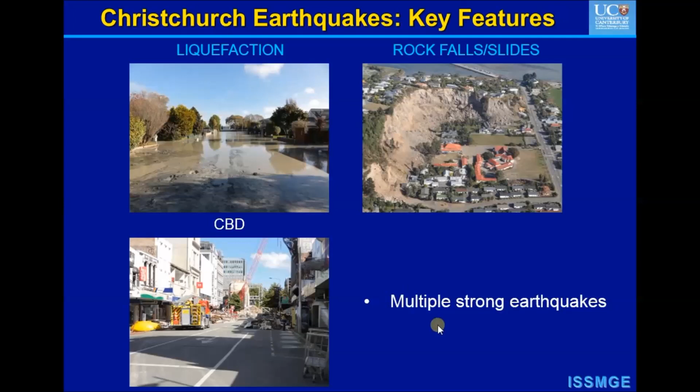So I'm going to focus on the impacts of liquefaction in these earthquakes, and we'll first briefly discuss the key characteristics of the Christchurch earthquakes, and then we'll follow with the discussion on the characteristics and manifestation of liquefaction and lateral spreading, followed by their impacts on buildings and infrastructure, including a little bit about residential land and buildings, multi-story CBD buildings, bridges, and pipe networks such as the wastewater and potable water systems of Christchurch.

Since the presentation is very dense and contains lots of information, I'm going to provide some summary remarks on these topics as discussed, and then we'll have brief general concluding remarks at the end of the talk. So let's start with the characteristics of the Canterbury earthquakes.

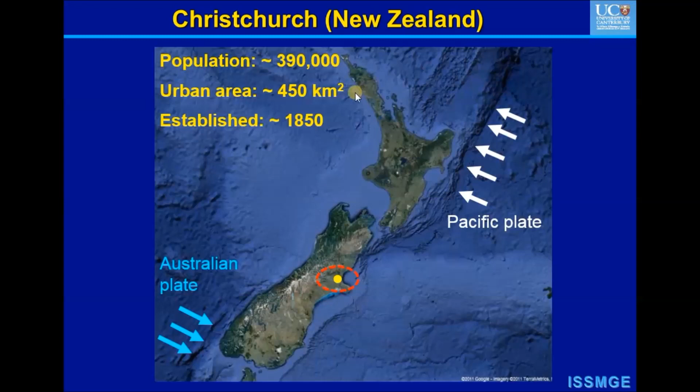Christchurch was established in the 1850s and is currently the second largest city of New Zealand, with a population of about 390,000 and an area of approximately 450 square kilometers.

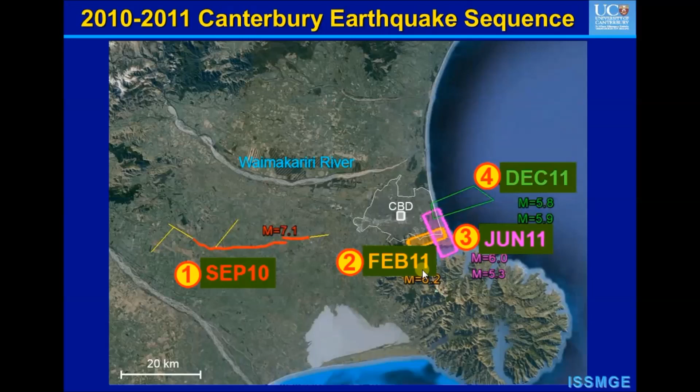What is evident is that all these earthquakes have sources within the city boundaries, and hence their effects were very damaging because they produce very severe ground motions. This kind of unzipping of faults and seismic activity is not unusual from a seismological perspective, but it was highly unusual that an urban center was affected repeatedly by very strong earthquakes with sources within its boundaries.

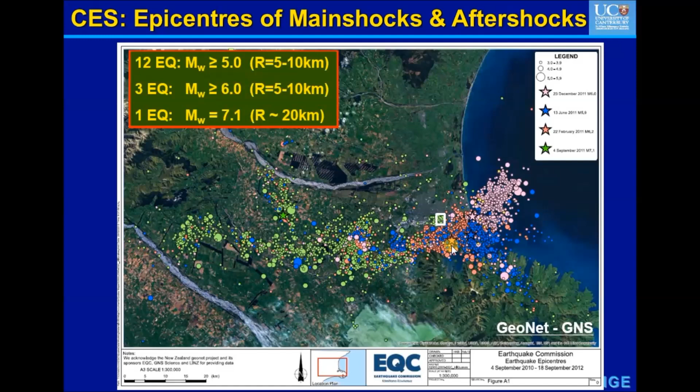This slide shows the cumulative impact of earthquakes. Here each earthquake is shown by its epicenter, and we can see indeed that the sources of these earthquakes were within the city suburbs, and in particular the February 22nd earthquake produced heavy damage and extremely violent ground shaking.

In all other events, however, we can also see reasonably high PGAs of 0.15 to 0.2 G, and these are all damaging levels of ground accelerations, and indeed in all these events liquefaction was induced. But of course particularly damaging was this event on the 22nd February 2011, which we can consider as an extreme event.

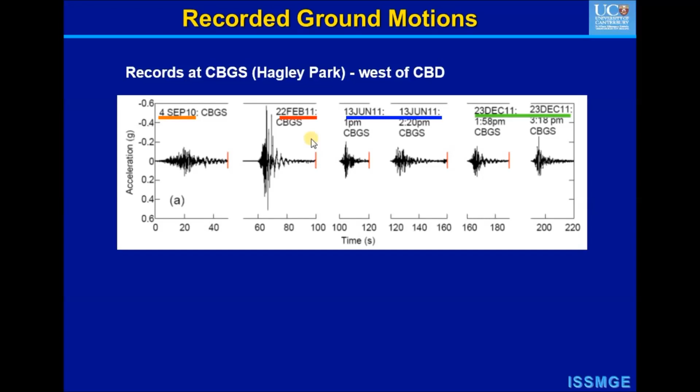It is common in liquefaction evaluation to quantify the seismic demand using the cyclic stress ratio, or CSR, which is then normalized to an equivalent magnitude 7.5. So we have calculated CSR 7.5 at shallow depth at the water table, and in such case this CSR value is actually a function only of the PGAs and the magnitude of the earthquake. Using this data, it was easy to calculate CSR 7.5 values at the water table, which in this case we will see is very shallow at 1 or 2 meters depth, and we've got very high CSR values from 0.15 to 0.3.

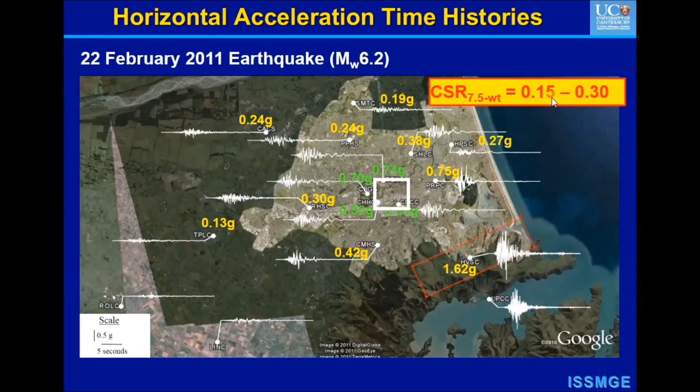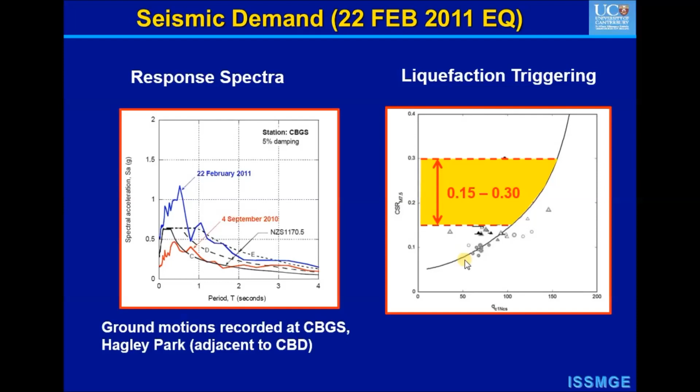Or if you like, with increase in the density of the soil. Here we have the seismic demand caused in terms of CSR by the 22nd February earthquake, from 0.15 to 0.3 CSR values, which far exceed the liquefaction resistance of low to medium soils with low to medium penetration resistance, or soils with low to medium densities. This shows that the seismic demand was exceptionally high, both for buildings as well as for liquefiable soils. And as we are going to see, many of the soils in Christchurch actually have a very low liquefaction resistance, so the widespread liquefaction that occurred during this event was not unexpected.

So in summary, unfortunately the February event caused also 185 fatalities, and it caused the complete destruction of the CBD. As I mentioned, nearly 70% of the buildings, or approximately 2,000 buildings, have been demolished. The earthquakes also caused tremendous damage due to liquefaction, widespread liquefaction affecting 60,000 residential properties, out of which 20,000 were severely affected and 8,000 were abandoned because it was considered uneconomic to reinstate those areas as residential areas.

The liquefaction also shattered the lifelines of Christchurch. For example, the wastewater system had loss of service or limited service over approximately 700 kilometers, and there were over 4,000 breaks on the potable water pipes. The liquefaction also caused heavy damage to roads and bridges, and lateral spreading was particularly damaging for areas close to waterways.

The total economic loss inflicted by these earthquakes is estimated at 40 billion New Zealand dollars, or approximately 20% of New Zealand's GDP. A simple calculation suggests that nearly 50% of these losses, or approximately close to $20 billion, was due to ground failures and liquefaction in particular.

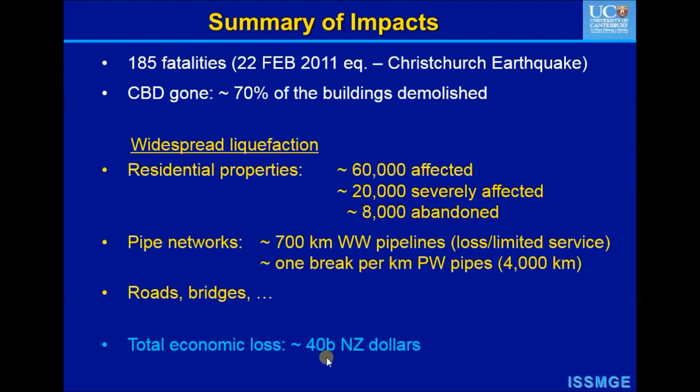In order to better understand characteristics of the Christchurch liquefaction, I am going to provide a very brief overview of the geology and ground conditions in Christchurch. As I mentioned previously, the plains are built of very thick deposits of gravel and sand layers interbedded with fine-grained soils, forming a complex interbedded formation with gravel aquifers and with artesian water pressures.

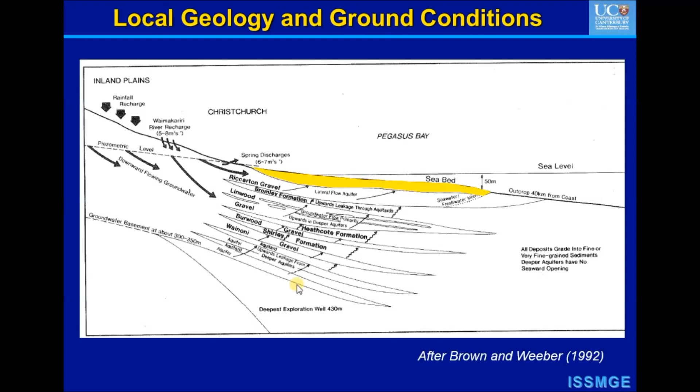It is estimated that approximately 10,000 wells have been sunk in the area of Christchurch since the 1860s, sourcing water from 20 to 200 meters deep wells. So for the liquefaction evaluation, we are going to focus on the near surface soils in the top 20 to 40 meters. This is an east-west cross section.

Here is the coast, and this is the sea level. At the west edge of the city, the elevation is about 25 meters above sea level, and then we have a very gently sloping ground towards the ocean - 25 meters elevation difference over 17 kilometers length.

So the surface alluvial soils overlie the topmost gravel, the Riccarton gravel, which is a gravel of an older age, 15 to 70,000 years old, and is also the uppermost aquifer. The thickness of the alluvial deposits, or depth to Riccarton gravel, is about 10 meters in the west part of the city, 20 to 25 meters in the CBD, and about 40 meters at the eastern edge of the city.

Because of the issues with aquifers and potential water contamination, the CBD buildings are typically on shallow foundations or on pile foundations which are within the alluvial deposits, so the tips of the piles do not reach the deeper and more competent gravel layers.

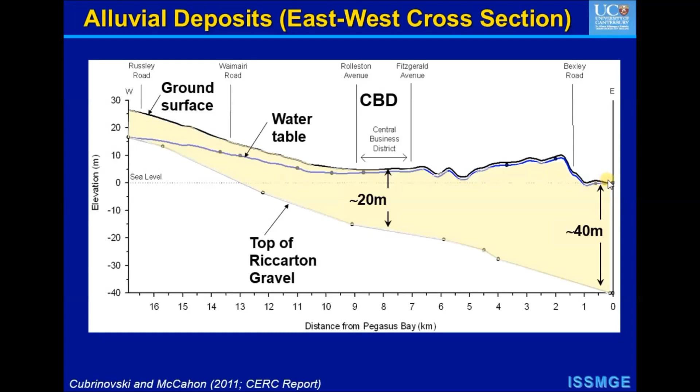The water table is at 5 to 7 meters depth in the western part of the city, and then becomes progressively shallower. It is within the top meter or two from the ground surface in the CBD, and is also very shallow to the east, in the eastern suburbs of Christchurch.

This is apparent in this slide, where median depth to water table is shown, and bluish colors, which are predominant in this slide, actually indicate very shallow water table at the ground surface, 1 or up to 2 meters depth. So most of the soils are fully saturated close to the ground surface.

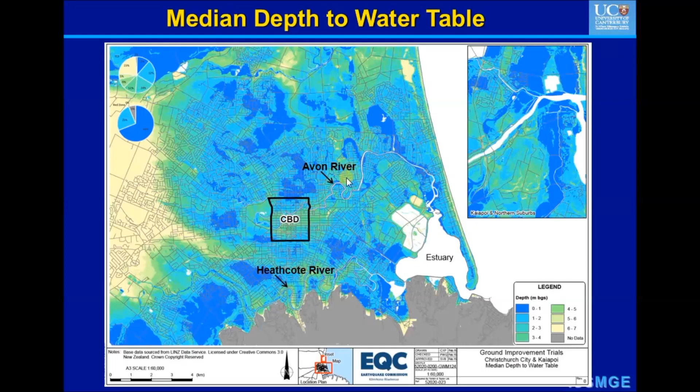Two dominant features present in Christchurch are the Avon River, shown here, and the Heathcote River to the southern part of the city. These rivers originate from the western springs in Christchurch and then meander through the city and discharge in the Avon-Heathcote estuary. As we are going to see later, particularly heavy was the liquefaction along the Avon River.

This is how Brown and Weeber describe the city of Christchurch in their excellent study on the geology of Christchurch. They say originally the site of Christchurch was mainly swamp, estuaries and lagoons, gravel, sand and silt of river channel and flood deposits. The Waimakariri River regularly flooded Christchurch, and since European settlement in the 1850s, extensive drainage and infilling of swamps has been undertaken.

Using data from their study, we prepared this plot where the age of the soils was estimated based on radiocarbon dating of soil samples and is plotted against the depth of the samples. The plot shows that in the top 5, 6, 7 meters the soils are relatively young, less than 2,000 years old, and in the shallower parts we can see some soils which are only a few hundred years old.

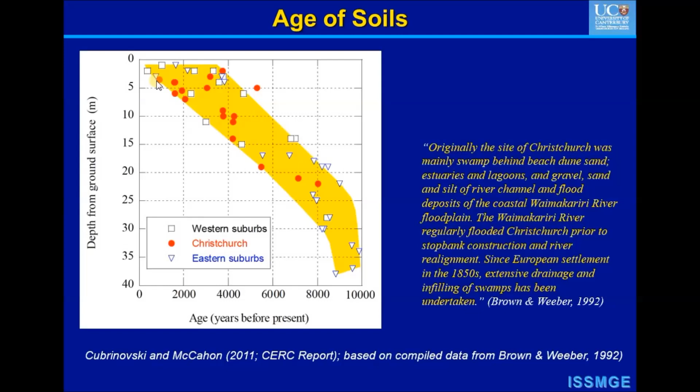So in summary, by their composition as fine sands or silty sands with low plasticity or non-plastic fines, deposited at low or medium densities associated with a fluvial depositional environment, fully saturated with a very high water table close to the ground surface, and a relatively young age, these are all factors pointing to a very high liquefaction potential.

One may also argue that the intense groundwater regime and water flow prevented some beneficial aging effects from developing and increasing the liquefaction resistance, which otherwise would have occurred in a more stable and less disturbed ground environment.

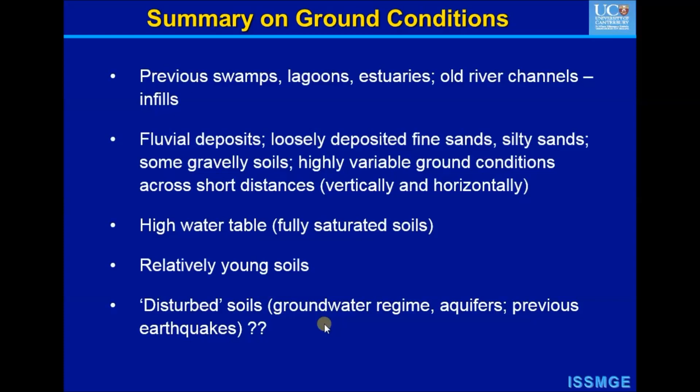So, having in mind the very high seismic demand on one hand and the very high potential for liquefaction of these soils, it wasn't a surprise that the very severe shaking produced by the February earthquake caused extensive liquefaction throughout Christchurch. Following this earthquake, we conducted a drive-through reconnaissance in order to document the manifestation of liquefaction throughout the city.

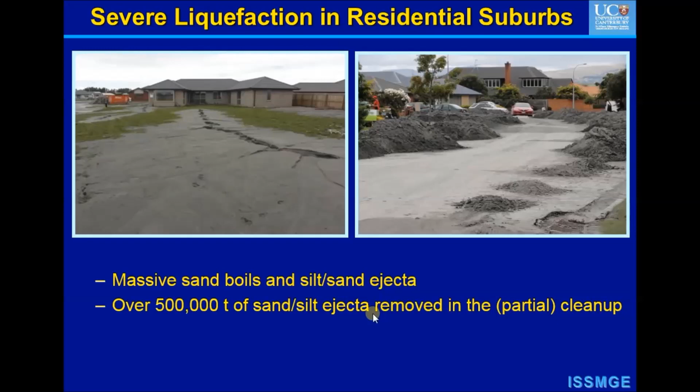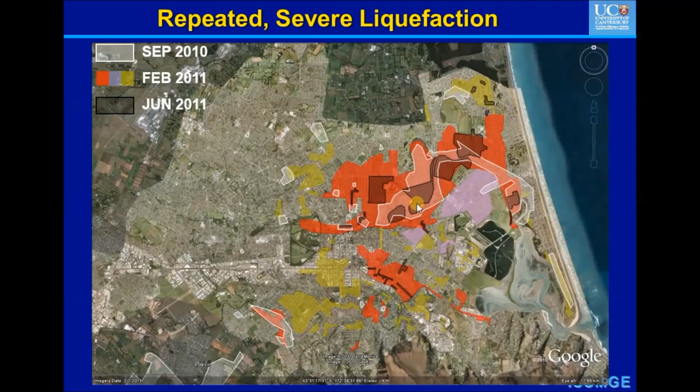Probably the best evidence for the effects of liquefaction was obtained for this property at Avonside, where my colleague Mark Quigley documented the liquefaction in the backyard. You can see significant sand boils covering the backyard after the September 2010 liquefaction, with clear cracks and fissures through which water, sand and silt were reaching the ground surface, forming a line that goes toward the door of this shed.

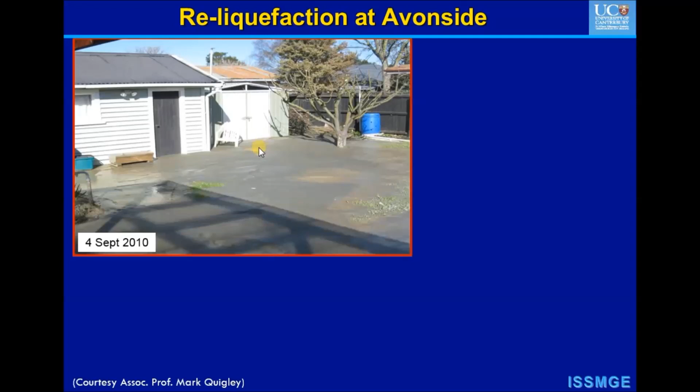They cleaned up the property, and then this is what happened in the second event, February 2011. We are seeing exactly the same alignment of sand volcanoes along the same crack or feature, which obviously served as a pathway for water and sand ejecta in the subsequent event.

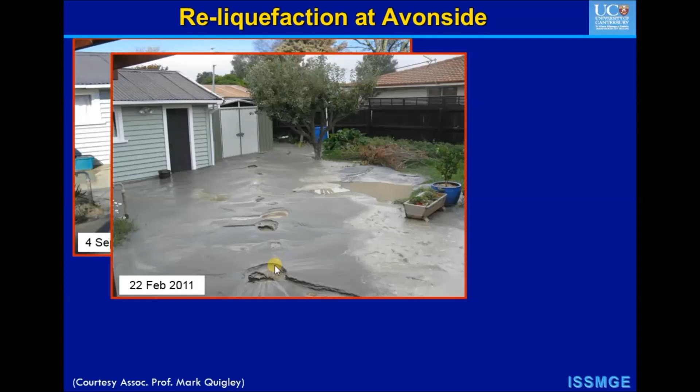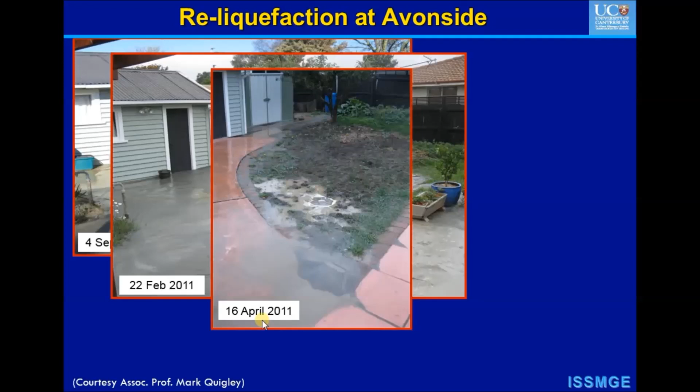They cleaned up the property again, and we are seeing now very small evidence of liquefaction during a minor magnitude 5 event on April 16, 2011. Then there was the 13th of June event, first magnitude 5.3, and then magnitude 6 eighty minutes later.

So we can see repeated liquefaction with very severe manifestation of sand boils, and pretty much the same features appearing along which water and sand ejecta reach the ground surface. This is not surprising. Clearly, liquefaction results in very non-uniform ground deformation. It also creates weaknesses, especially in the surface parts of the deposits, cracks and fissures, which create pathways for water and sand ejecta to reach the ground surface in subsequent events.

Also, if we think about the liquefaction process, it is associated with significant seepage and water flow, which disturbs the soils near the ground surface. We also know that following liquefaction, soils resolidify and reconsolidate under gravity loads, getting densities that are not very high. So the density of the soil deposit after liquefaction is going to be medium density, not very high. We also know the fabric of these soils is going to be very weak and highly susceptible to reliquefaction. And the behavioral age of the deposit is going to be reset to zero, because liquefaction erases any beneficial effects of aging in terms of increased strength and stiffness.

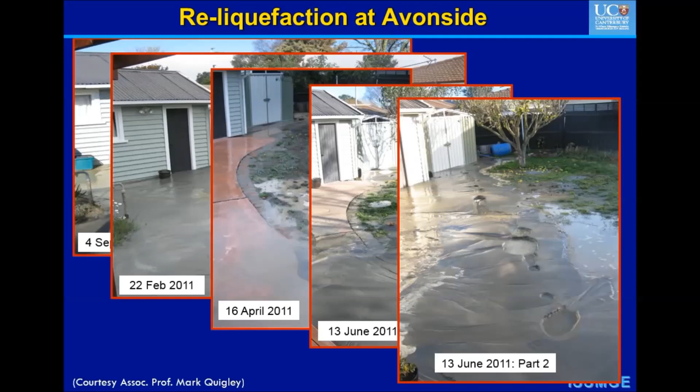I'm mentioning this because quite often liquefaction is associated with substantial settlements, and these settlements are often interpreted as ground densification of the liquefied soils, leading to the assumption that liquefaction resistance should increase after a liquefaction event. I think we have abundant evidence from Christchurch, as well as the reasoning I just outlined, that we should not expect any improvement in liquefaction resistance or performance of structures on previously liquefied soils, especially when the liquefaction caused heavy disturbance of the soils near the surface.

This is now a summary of LiDAR data showing the total settlements that occurred in Christchurch from September 2010 to December 2011. Red color indicates large settlements, some subsidence from 0.5 to 1 meter. We can see that those are areas typically very close to the Avon River or to estuaries.

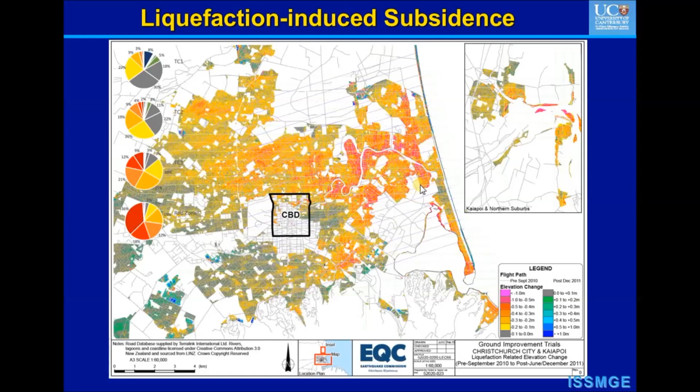Such large subsidence and settlements occurred really in areas that don't have lateral confinement, and were often associated with slumping modes of deformation, including lateral expansion and vertical settlement. Bexley is one of those areas, adjacent to the estuary, and you can see the subsidence here of 1 meter completely changed the elevation in relation to the water in the estuary, significantly increasing the flooding hazard for this area.

So this increase in the risk of flooding, in conjunction with the serious effects of lateral spreading which were prevalent in these areas, were really the two factors why these areas were abandoned and declared as red zone residential areas.

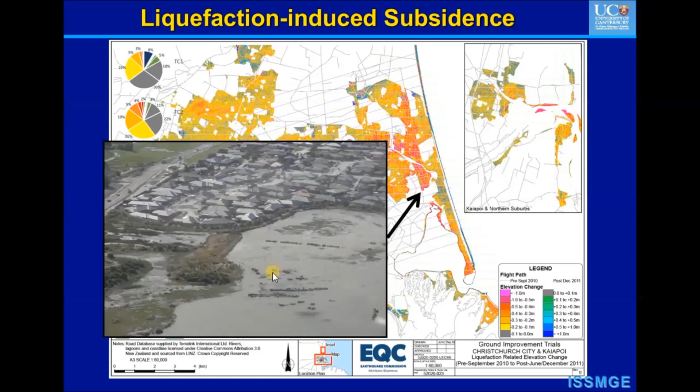Critical layers for liquefaction were these fine sands and some of the silty sands, and there was severe manifestation of liquefaction when there was this kind of thick, continuous liquefiable sand deposit.

In the southern parts of the city, more common are stratified layers where liquefiable layers are sandwiched between non-liquefiable layers or silty soils with Ic values close to the threshold. It was observed that in such cases the manifestation was much smaller and the damaging effects of liquefaction were significantly reduced.

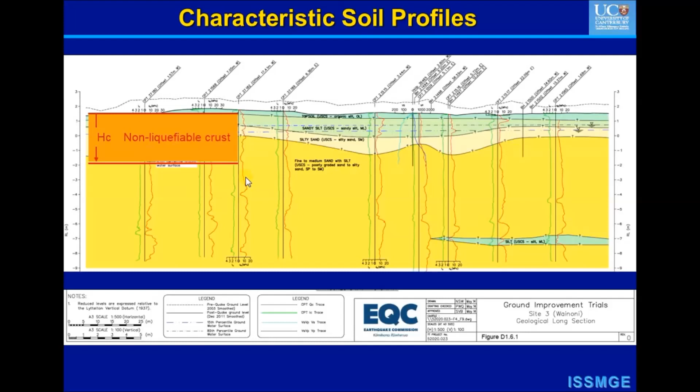This is in line with the well-known conceptual chart of Ishihara from 1985, which suggests the same thing regarding the influence of the non-liquefiable crust layer on the manifestation and damaging effects of liquefaction at the ground surface.

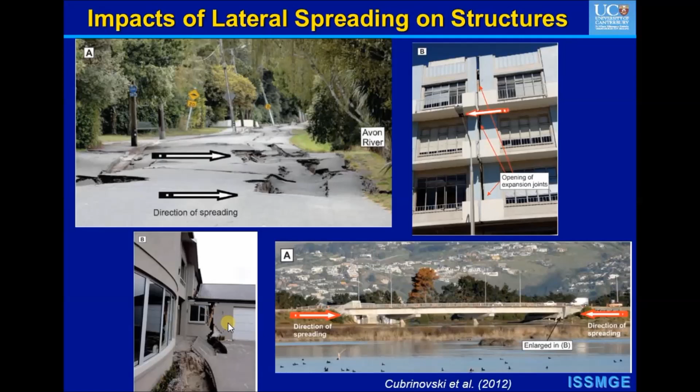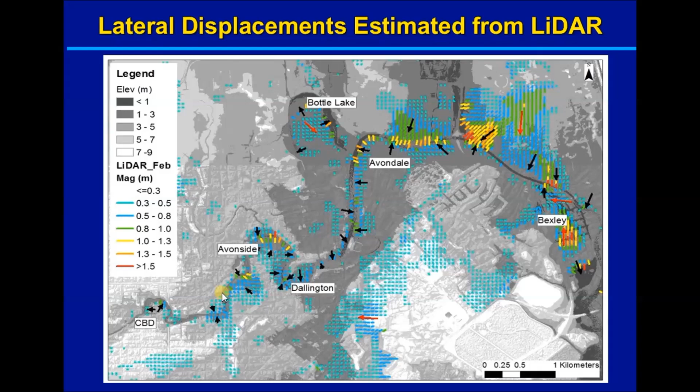Lateral spreading was surely the most damaging phenomenon associated with liquefaction, affecting roads, bridges, buildings, and residential houses. It was typically confined and occurred along rivers, streams, waterways, old river channels, and swamps, and typically affected a zone about 50 to 200 meters away from the waterway.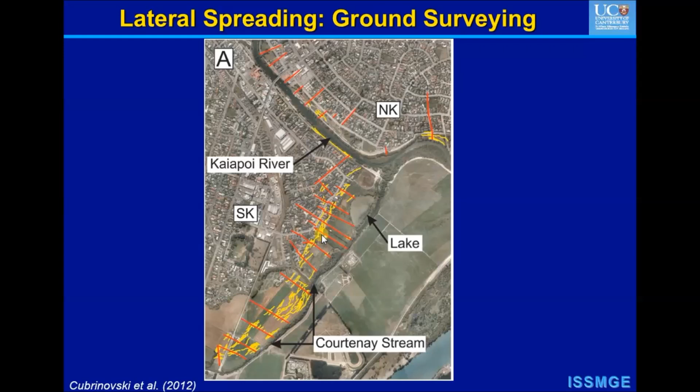Very different lateral spreading patterns were observed in these two areas, so I'm going to point out some of these differences. We did ground surveying and conducted detailed measurements of lateral spreading displacements along these transects, shown as red lines. We would first identify cracks on the ground surface and then measure the width of the cracks to develop plots of permanent lateral displacement against distance from the waterway.

We are seeing two very different distribution patterns. This is North Kaiapoi, where permanent lateral spreading displacements at the river banks were somewhere between 0.5 and 3 meters, decreasing with an exponential decay, which is a typical reduction pattern of lateral spreading displacements. The spreading affected an area of approximately 100 to 200 meters.

We are seeing a very different distribution pattern in South Kaiapoi, where practically a block of soil about 150 to 200 meters adjacent to the river moved towards the river by about 1.5 to 2 meters, and the largest cracks opened behind that block. Those large cracks are indicated by sharp reductions in displacements at a distance between 150 and 200 meters.

Unfortunately, these large cracks and ground openings, due to block failure movement associated with spreading, occurred right where the houses were along Courtenay Drive. These cracks were practically running through houses and rupturing the houses, as shown here.

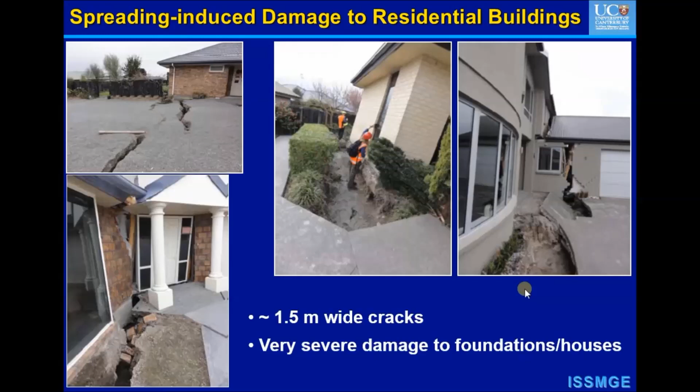Fortunately, the New Zealand houses are timber framed. They are very ductile and can accommodate large deformation without collapse, and practically there wasn't any collapse in these areas despite the extreme ground deformation and demands. So this is surely one of the success stories from the Christchurch earthquakes.

We've conducted ground surveying measurements along a large number of transects, about 150 in total. I'm showing here measurements along the Avon River, where red lines indicate measurements after the September earthquake, and blue lines indicate measurements after the February earthquake.

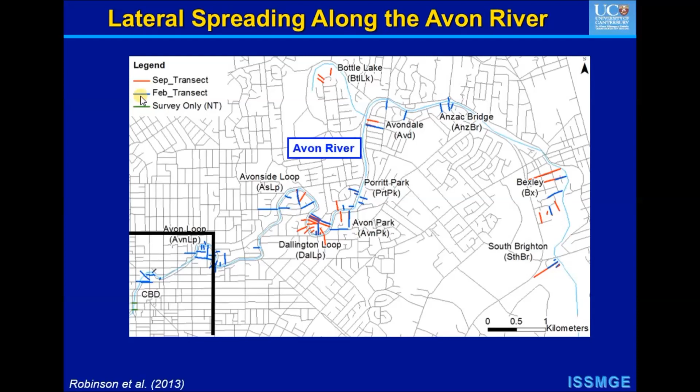Each transect has a summary dataset of this nature, with measured ground displacements as a function of distance from the waterway, with two lines: one for the September event and one for the February event. Then we have the ground slope before and after the earthquake, and a number of CPTs defining the typical soil profiles, which we use to conduct a more detailed liquefaction analysis and identify the critical layers responsible for spreading movements.

In that analysis, we also used details on ground displacements obtained from LiDAR, which provides global patterns of movement, unlike our localized measurements along the transect. So this kind of data has been summarized.

We first eliminated all areas where very complex patterns of spreading were observed, and tried to look into the simple ones, identifying three typical patterns of movement and magnitudes of ground displacements. Here is what we call large and distributed ground displacements.

The spreading displacement in this case was anywhere between 0.5 meter and 1.5 meter, and the distance affected by spreading was up to 100 or 200 meters from the river.

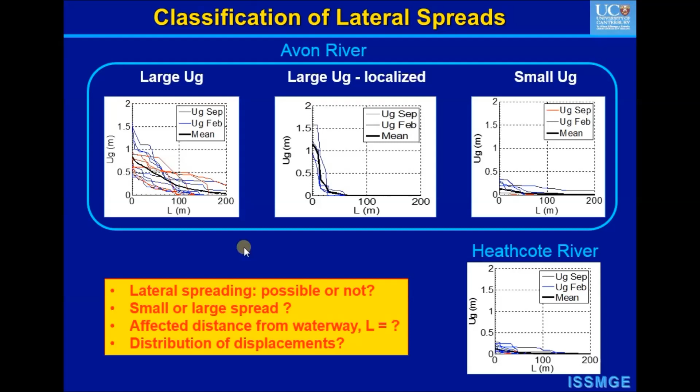So to close this part on lateral spreading, I'll just mention the very complex patterns of spreading observed in meandering loops, with one feature to highlight here.

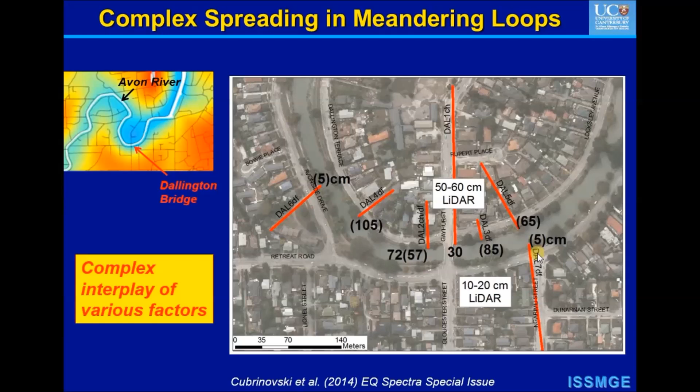This is the meandering loop at Dallington, where on the internal part, with point bar deposits, there were large spreading displacements, roughly 1 meter of lateral spreading movement toward the river. On the opposite side, at the cut bank, where the soils are better, the spreading movements were very small or practically negligible. This is the difference in the approaches to this bridge.

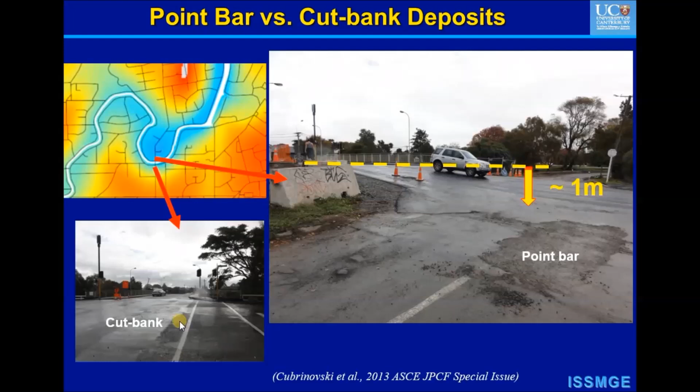On the point bar side, the settlement associated with spreading was close to 1 meter, whereas on the cut bank side, just 30 meters across on the opposite side of the bridge, the approach showed very little ground distortion because the spreading movements were very small in that area.

The second part of this presentation is going to focus on the effects and impacts of liquefaction on buildings and infrastructure, and we'll start first with residential buildings.

New Zealand has a very high earthquake insurance coverage. For example, residential properties and buildings were covered in approximately 90% of cases in Christchurch. What is unusual and unique is that we have insurance coverage not only for residential buildings but also for residential land. For that reason, the agency in charge of earthquake insurance, the Earthquake Commission or EQC, and their engineers, Tonkin and Taylor, performed very detailed inspections to document damage to land and foundations.

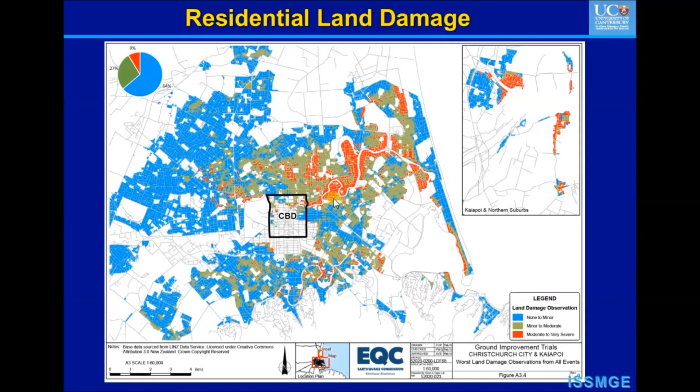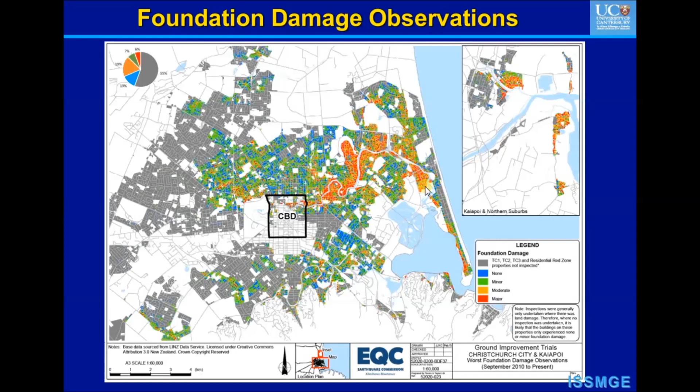Green is minor and blue is none, and gray shows areas that were not inspected for foundation damage because there wasn't any apparent land damage in those areas. The worst damage, covering all four major earthquake events, occurred along the Avon River, and that damage was associated mostly with lateral spreading.

As mentioned previously, residential houses in Christchurch are typically timber frame structures, and here we can see the two prevalent foundation types: concrete slab on grade, and continuous perimeter footing. In the case of single-story buildings on concrete slab, the slab is only 100 millimeters thick and has no reinforcement except near the edges with the foundation beam.

The perimeter footing has different details depending on the age of construction. Prevalent are concrete perimeter footings with different reinforcing details. There is a timber floor supported on the perimeter footing with some additional floor supports internally, and these supports are loosely connected to the timber floor, so they cannot really provide any lateral resistance or lateral load carrying capacity.

So the foundations really have deficiencies in terms of accommodating large ground displacements associated with liquefaction or spreading loads associated with lateral spreading. But we have to put these foundations in the context of the historical development of Christchurch, where these structures were developed well before the birth of earthquake engineering or any engineering considerations of soil liquefaction.

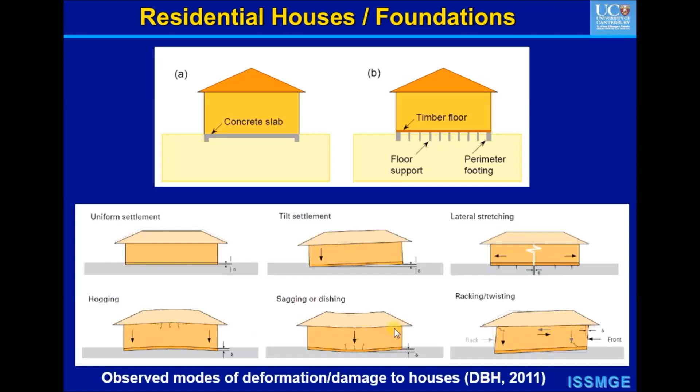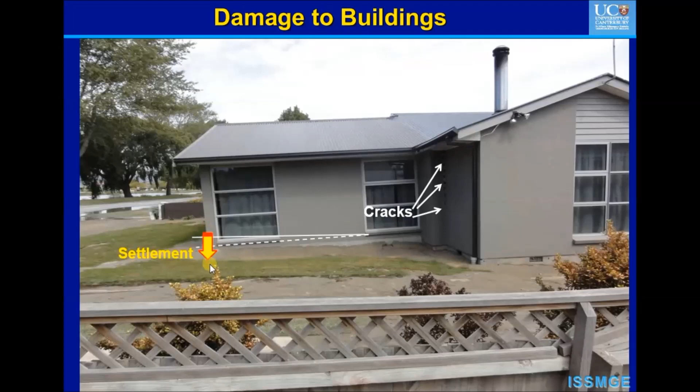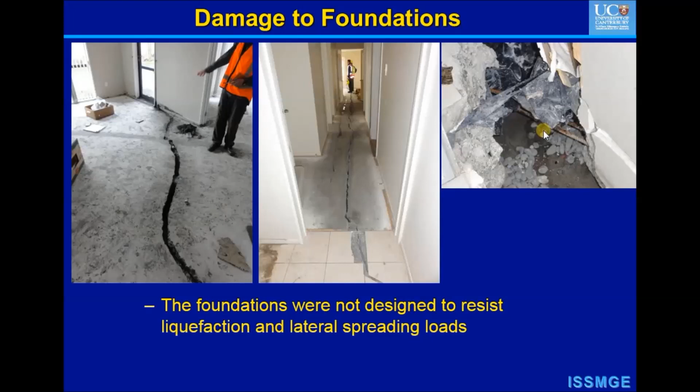Because of the large flexibility and deformability of these foundations, the buildings exhibited a range of different modes of total settlement, differential tilt and settlement, extensional deformation and rupture, and different shapes and distortion of the houses, as indicated in this schematic plot. This is a typical manifestation of liquefaction-induced damage, with differential settlement causing propagation of damage in the superstructure, damage to the concrete slab and cracks due to lack of reinforcement, or rupture of reinforcement in the foundation beam due to insufficient reinforcement in areas subjected to lateral spreading.

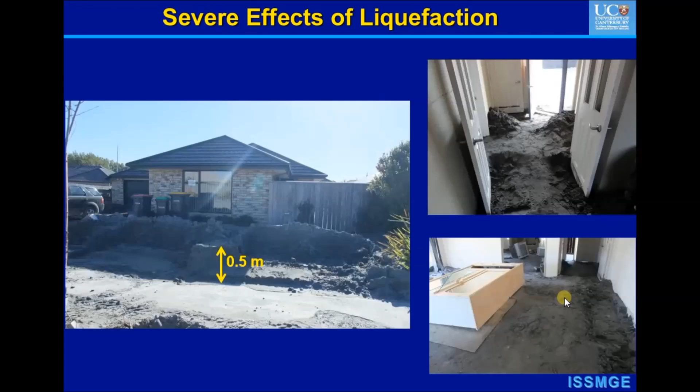Now again, we need to put this in context of very severe effects of liquefaction. As shown here, in many areas the ejecta was half a meter thick, and quite often the ejecta completely covered the interior of the house, as shown on these photos.

We've conducted detailed investigations for 40 such buildings on concrete slab foundations, and measured vertical displacements or settlements at multiple locations in order to identify maximum differential movements and maximum slope of the concrete slab. That measured slope is plotted against the severity of liquefaction observed on the property, for five different categories ranging from no liquefaction, low liquefaction, to very severe liquefaction.

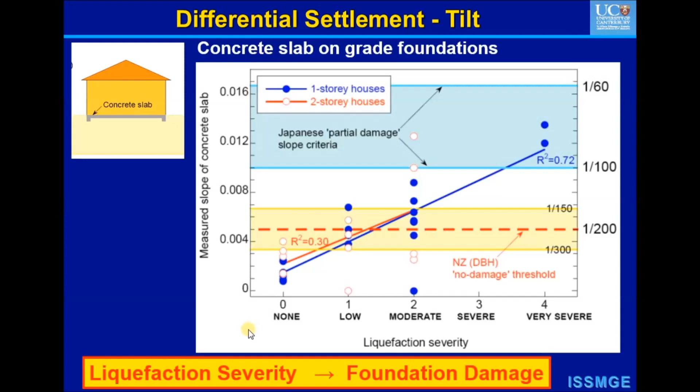Shown here with the dashed line is the no-damage criterion based on the New Zealand Department of Building and Housing, and based on this criteria we can see that these foundations had acceptable performance in areas of no liquefaction, maybe marginal performance in areas of low liquefaction, and inadequate performance in areas of moderate or severe liquefaction. Clearly, the foundation damage is related to liquefaction severity, as was the case for various engineering structures indeed.

As I mentioned previously, 60,000 residential buildings were affected by liquefaction, and 20,000 of those were affected seriously. So there was a comprehensive program developed by the Ministry of Business Innovation and Employment, together with the engineering community, to address the repairs of these residential properties. The first thing that was done was they conducted land zoning and divided land into 3 different technical categories.

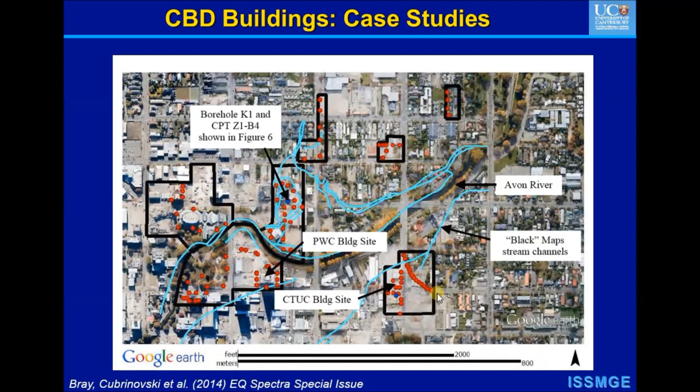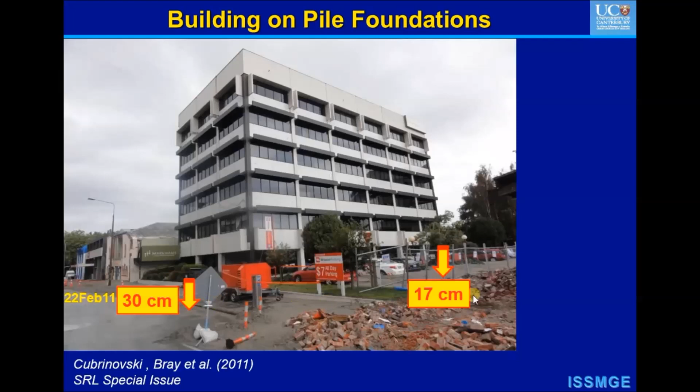In February, the soil surrounding the building settled approximately 30 centimeters at this end and close to 20 centimeters at the other end. You can see now this large vertical offset between the ground, which settled 30 centimeters, and the building, which obviously didn't settle much. This is the beam connecting the pile caps, because the beam was on deep foundations supported at a depth of up to 15-16 meters below the ground surface.

You can see this offset of the foundation beam and the surrounding soil, and the parking lot is trapping the cars, because before the earthquakes this was clearly a flat ground surface. There was additional settlement in this part of 20 centimeters during the June event, where the total settlement reached about 50 centimeters. So this clearly shows the dramatic difference in the performance of shallow and deep foundations in liquefied soils.

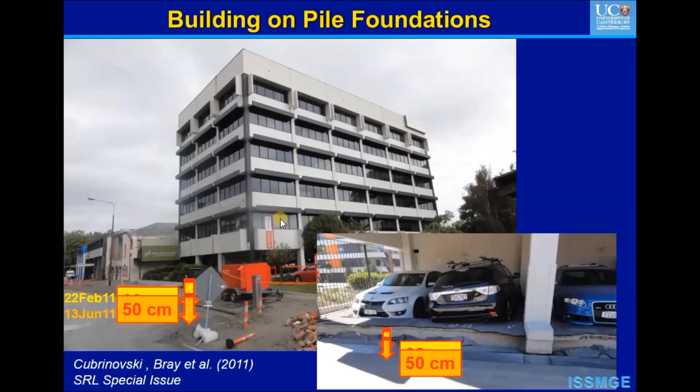Now, this building was demolished due to structural considerations, and unfortunately we don't have details about the performance of the piles and the damage caused to them in these events.

The final point to mention about the performance of multi-story buildings is shown here, where a number of high-rise buildings were showing a permanent or residual tilt after the earthquakes. This is very difficult to deal with because of the size of the buildings and difficulties in recovering and re-leveling them.

There were traces of liquefaction, some evidence of minor liquefaction, which was probably contributing to some extent to this outcome. But we have to keep in mind a range of factors really influencing the dynamic response of these buildings, including their dynamic behavior, soil-building interaction, very complex foundations in particular for this building, and non-uniformity of ground conditions across the footprint of the building. So those are all issues contributing to the residual tilt, but clearly geotechnical conditions and ground response were key contributing factors.

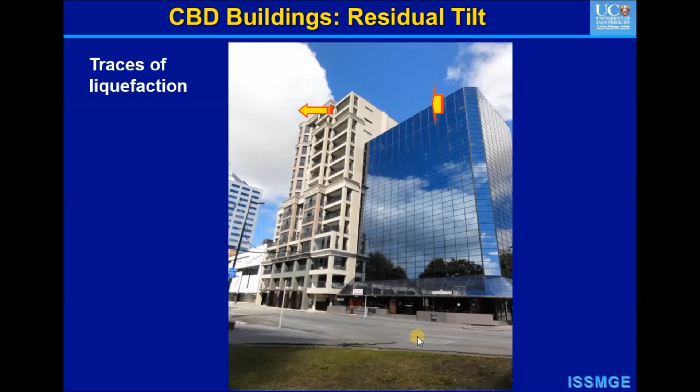Now, bridges in Christchurch were affected in a very specific and consistent way, and I'm going to use the bridges along the Avon River to illustrate the characteristic effects of lateral spreading. The spreading displacements were relatively small in the CBD, up to 30, 40, 50 centimeters. They reached about 1 meter at the Avon Loop, and from the CBD up to the estuary, the bridges were exposed to lateral spreading displacements on the order of half a meter to 2 or 3 meters, depending on the particular location and ground conditions.

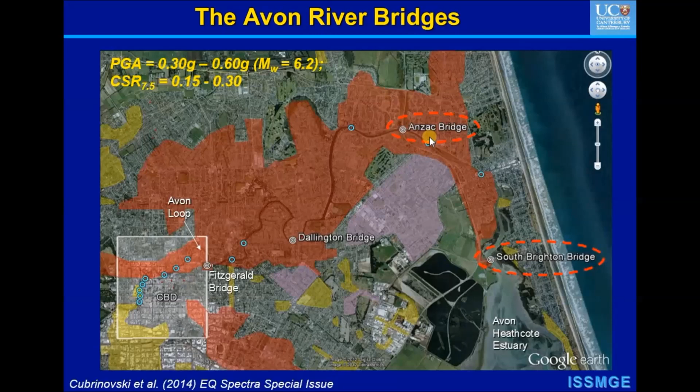So I'm going to use a couple of case studies, the South Brighton Bridge and the Anzac Bridge, to illustrate some of the key mechanisms and damage patterns.

Before that, I will introduce the mechanism itself. The key feature is that the bridges in Christchurch are short to medium-length bridges, typically 25 to 50 meters long, with 2 or 3 spans, and they have a very robust, sturdy, stiff and strong superstructure.

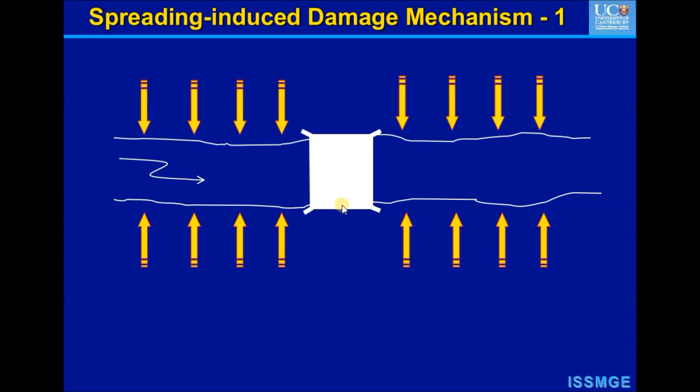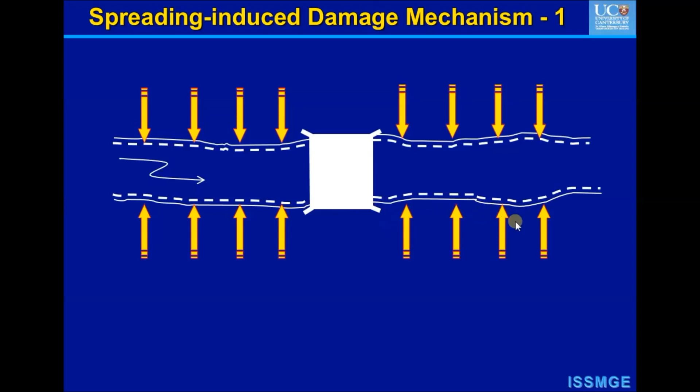So when lateral spreading occurred and produced very large ground displacements, closing the river banks towards the river, this stiff and robust superstructure resisted those movements and reduced the ground displacements at the approaches as well as in the foundation soils at the abutments.

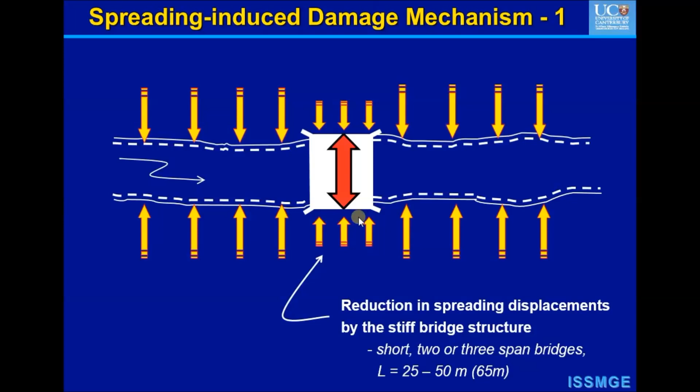This produced a strutting mechanism, and since the bridge superstructure prevented any displacement at the level of the deck, while the foundations were obviously not as stiff and strong, there was deformation in the foundation soils and foundations themselves. This caused inward rotation of the abutments, which pushed the piles towards the river and bent them, producing typical deformation patterns and damage to the piles.

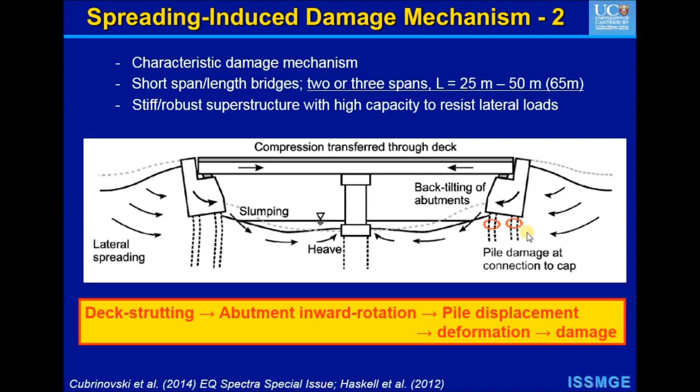This was consistently observed for all bridges along the Avon River and Heathcote River, the only difference being the amount of abutment rotation or pile displacement and the resulting damage levels to the piles.

So let's examine some of the details of this mechanism by using a couple of case studies.

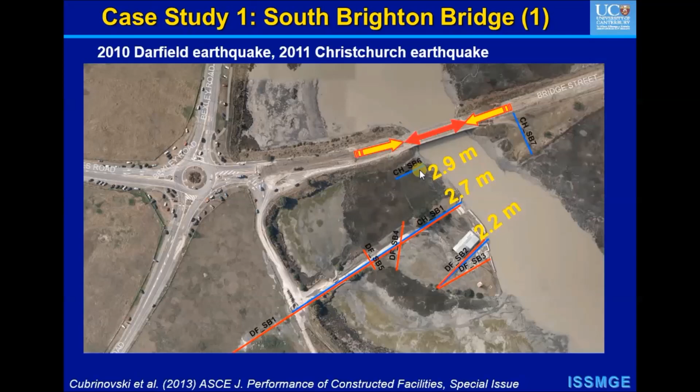The first one is the South Brighton Bridge, where the lateral spreading displacements were 2 to 3 meters. This is a side view of the bridge, showing large lateral spreading displacements of 2 to 3 meters attacking this area in the bridge.

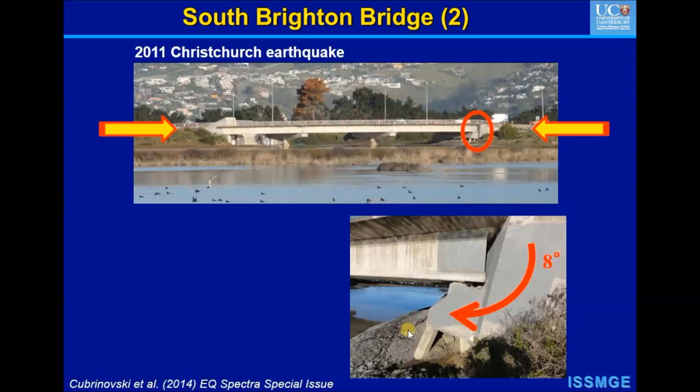We can see the very robust superstructure, the RC deck with I-beams, and if we zoom in on the contact area between the abutment and the I-beam, we see the collision point around which the abutment rotated. This is a permanent rotation of 8 degrees that pushed the piles towards the river and damaged the piles.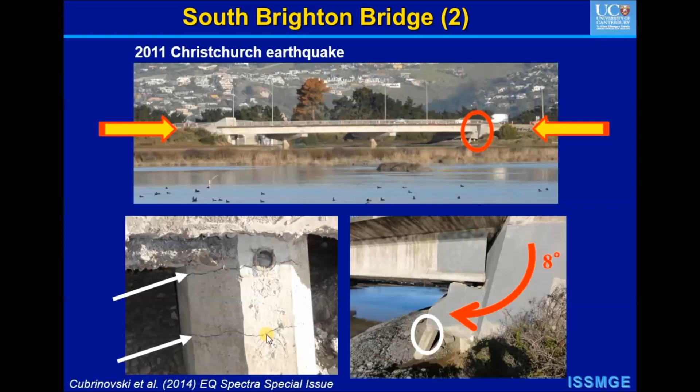On the river side, there are nice horizontal cracks associated with bending of the pile. On the land side of the pile we can see concrete crushing and spalling, consistent with the compressional stresses and deformation there. It is also apparent that there is some ground distress in the foundation soils between the abutment piles, indicating lateral displacements of the foundation soil towards the river.

So it's really important to understand the size of this ground displacement within the piles in relation to the free-field displacements of the river banks.

The Anzac bridge provides an excellent case study giving us the details of those movements. As you can see here, this is the south approach of the Anzac bridge, where you can see large sand boils illustrating moderate to severe liquefaction in this area, accompanied by lateral spreading.

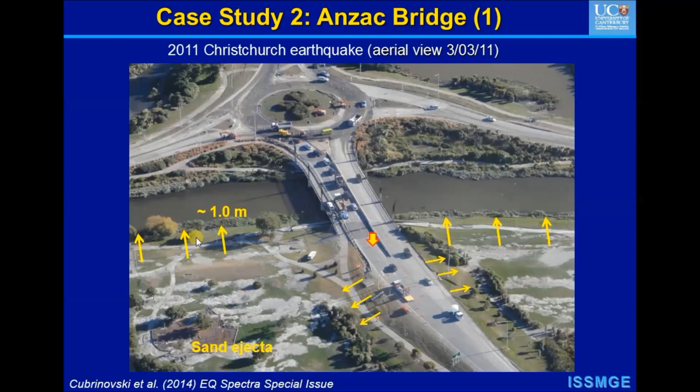The spreading in the free field was about 1 meter. Again, the bridge exhibited the same mechanism associated with deck strutting, inward rotation of the abutments of 6 degrees in this case, and displacement of the top of the abutment piles of about 20 centimeters. The spreading displacements in the free field were about 1 meter.

This pedestrian underpass was on short piles, floating practically within the liquefied soils, providing a good estimate for the displacement of the foundation soils. Its displacement was somewhere between 40 to 60 centimeters. So we are seeing that the foundation soils have substantially smaller displacements than the free-field displacement - approximately 50% of the free-field displacement.

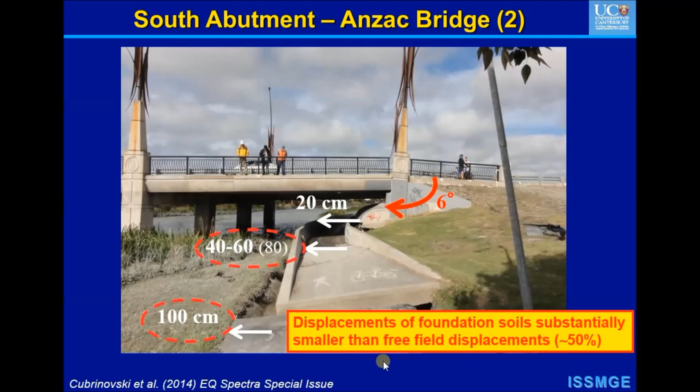We've conducted comprehensive pseudostatic analysis using single pile models and whole bridge models to investigate first the accuracy of this analysis method to capture the mechanism of deformation, deformation levels and damage levels for different components of the bridge and the piles in particular, and also to conduct sensitivity studies to investigate the key parameters in the analysis that control the pile response.

We identified that these analyses were capable of explaining the observed mechanisms and deformation patterns, and were providing levels of damage consistent with the observations from field damage inspections. From the sensitivity analysis we identified that the key parameters controlling the pile response were the magnitude of ground displacement, UG, hence the great importance of the reduction of foundation displacements that we just saw was 50% of the free field displacements.

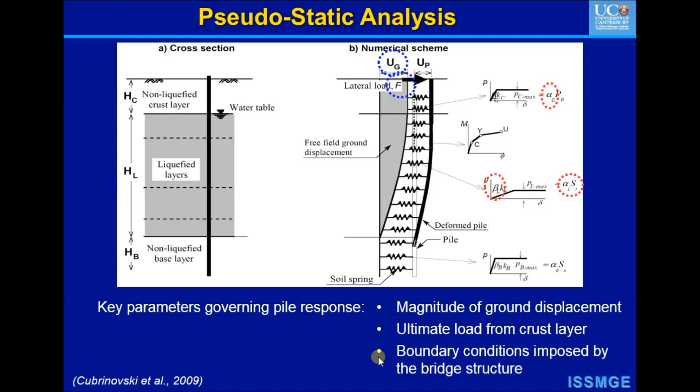The second key parameter was really associated with the parameters controlling the ultimate load from the crust non-liquefiable layer near the ground surface. And of course, the boundary condition imposed by the bridge structure was very important to be modeled in the single pile analysis.

These were captured in the whole bridge analysis, shown here, because we were modeling all components. In the whole bridge analysis, spreading displacements are applied to both abutments of different magnitude and distribution, and then some spreading displacements are applied to the pier piles.

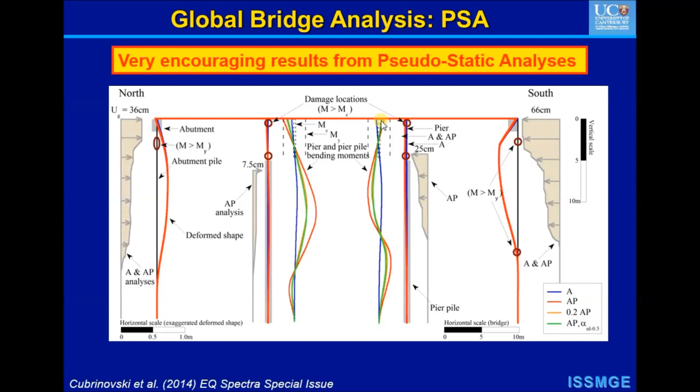This shows the deformed shape of the abutment piles, the piers, and the abutments themselves. We see bending moments along the pier piles and along the piers, with values somewhere between cracking and yield levels at the top of the piers, consistent with the observed damage levels for this bridge. So very encouraging results from the pseudostatic analysis.

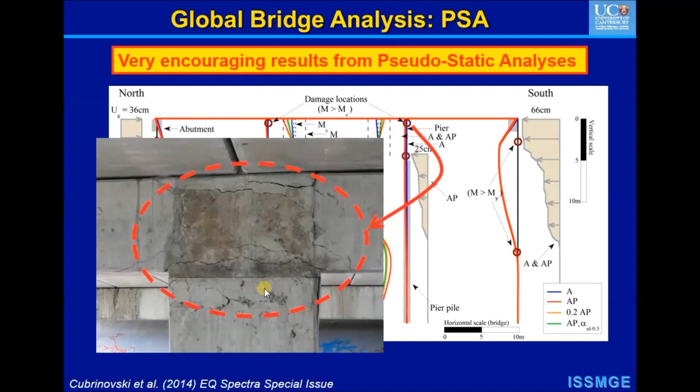In summary, we've observed a characteristic spreading-induced deformation and damage mechanism for bridges, in which a strong, robust and sturdy superstructure was critical, because it produced a deck strutting mechanism, which in turn resulted in inward rotation of the abutment, displacements and deformation of the piles, and consequent damage of the piles.

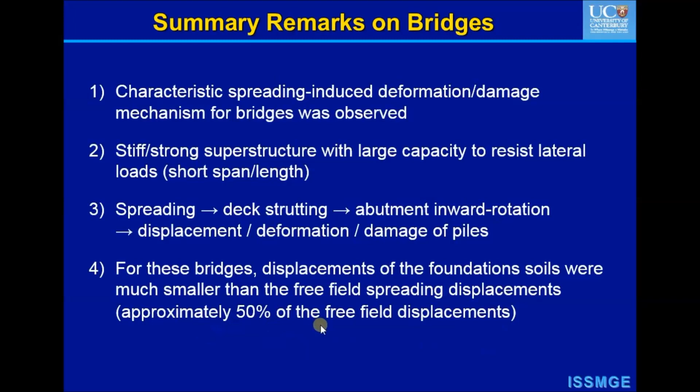We found that the displacements of the foundation soils were much smaller than the free field spreading displacements, and they were approximately 50% of the free field displacements.

So finally, I will conclude with very brief remarks on the impacts of liquefaction on pipe networks, and I'm going to use 3 different pipe networks to illustrate these effects.

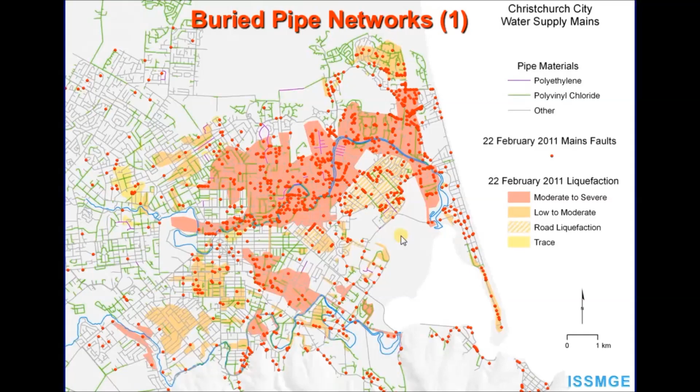The solid symbols here indicate the locations where failures occurred—locations of pipe breaks—and we can see that those largely coincide with the areas where moderate to severe liquefaction was observed. Indeed, 80% of the damage to the water mains occurred in areas that liquefied, and more than half were in areas where moderate to severe liquefaction was observed.

The PVC pipes are flexible because they have socketed joints, which allow some differential movements between adjacent segments, and their performance was much better when compared with the performance of asbestos cement pipes.

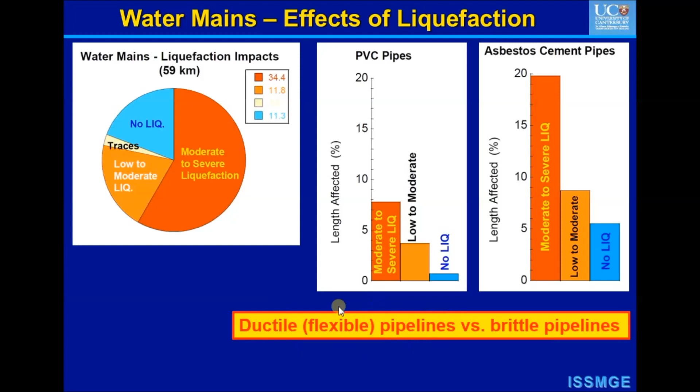In the case of asbestos cement pipes, 20% were damaged in areas of moderate to severe liquefaction, around 9% damage in low to moderate, and there was even 5-6% damage in areas of no liquefaction. These are really brittle materials and pipelines that cannot accommodate differential ground movements and displacement associated with liquefaction. So there's a clear difference and better performance of ductile materials and flexible pipelines as compared to brittle materials and pipelines.

The second network is the wastewater system, which was hit really hard by these earthquakes. In the central part of the city, which was developed by the 1950s or so, we predominantly have earthenware pipes or ceramic pipes, and then in the 1960s and 70s we have predominance of concrete pipes. So they are all brittle material pipes and pipelines.

They are embedded between 2 and 3.5 meters depth, so deeper, meaning more difficult to access and repair. This system was really heavily affected by liquefaction, causing breaks of pipes and infiltration of sand in pipelines. Also, since 90% of the system is gravity driven, there was a loss of grade due to differential movements induced by liquefaction, which reversed the flow and seriously affected the functionality of the system.

This is the service status of the system 1 month after the February earthquake, so this is for March 2011, where red lines indicate no service—140 kilometers were out of service—and over 540 kilometers of these pipelines had limited service. Again, we can see that the worst affected areas are the areas where moderate to severe liquefaction was observed.

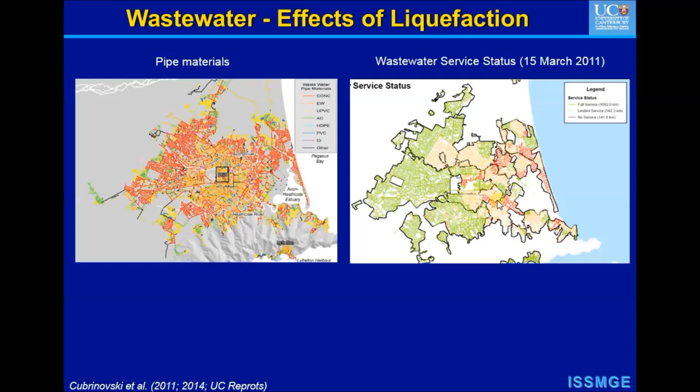Finally, I'll complete with the third network on a good note: the gas distribution system, 170 kilometers of pipelines, but these are medium density polyethylene pipes with electrofusion welds. These are very ductile materials that allow for large ground deformation and can, even if strained within several percent, still...

...keep their functionality. So practically there wasn't damage on this pipeline network, though we have to say that the exposure of this network to the worst affected areas of moderate to severe liquefaction was less than in the previous two cases. But still there was dramatically improved performance because of the capability of these flexible pipelines to accommodate large ground deformation associated with liquefaction.

So I will make now just brief concluding remarks.

During the 2010 and 2011 Christchurch earthquakes, we observed extensive and very severe liquefaction of fine sands and silty sands with low plasticity or non-plastic fines. Given the seismic intensity and high liquefaction potential, this wasn't really surprising. However, the effects were still unprecedented because of the urban setting and effects on buildings, infrastructure, and indeed very serious impacts on the residents of Christchurch.

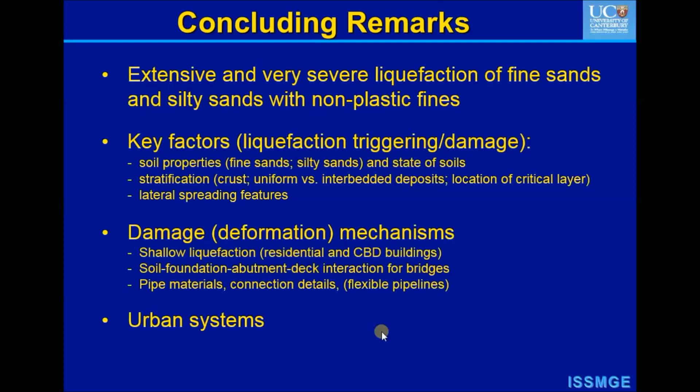With this, I would like to acknowledge the contribution of many people, first and foremost the dedication and efforts of my postgraduate students and postdoctoral fellows, the collaboration of Tom O'Rourke on issues related to lifelines, Jonathan Bray on CBD and silty soils issues, and Russell Green on liquefaction triggering and damage indices.